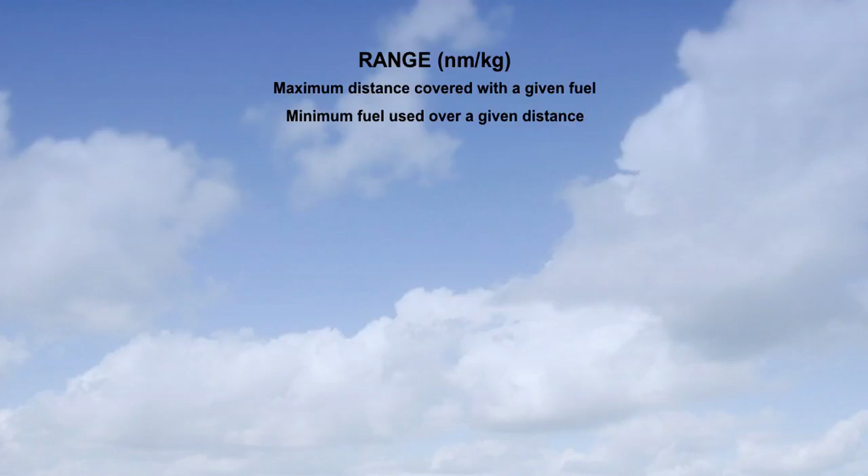Maximum range can be defined as being the maximum distance an aeroplane can fly for a given fuel quantity consumed, or to put it another way, the minimum fuel used by an aeroplane over a given distance. This latter expression of range is more commonly used for commercial operations. As a formula, range is simply the distance in nautical miles divided by fuel quantity in kilograms.

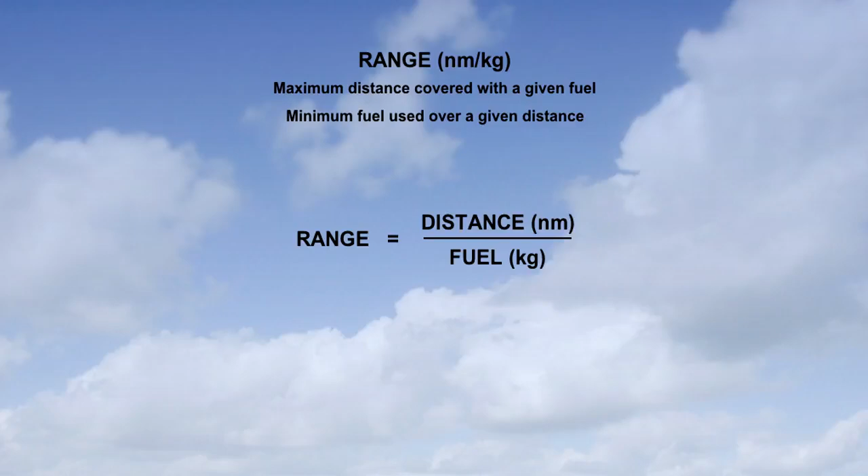However, in the same way as we did for the formula for endurance, we must adjust our range formula in order for it to give us useful information. The top line of the formula is air nautical miles per hour, and the bottom line of the formula is kilograms of fuel per hour. Thus, the formula now reads true airspeed divided by fuel flow. This is the formula for specific air range. The formula shows that specific air range is defined as the ratio of true airspeed over the fuel flow.

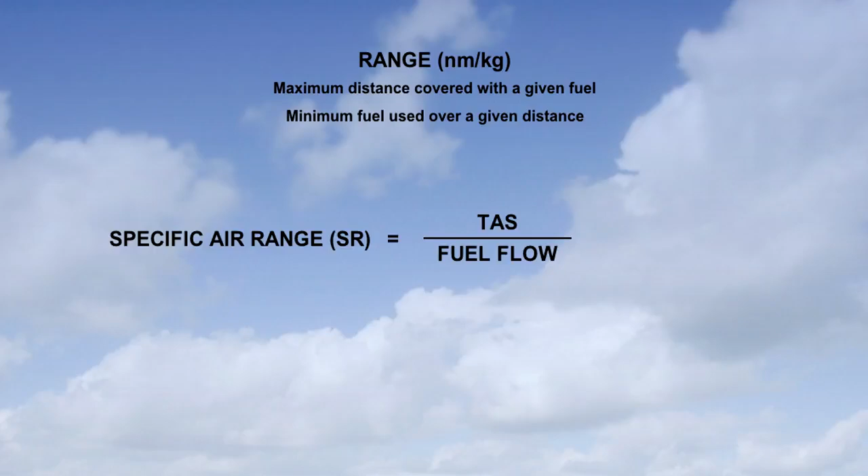You may recall from the endurance lesson that fuel flow is specific fuel consumption multiplied by drag for a jet, and specific fuel consumption multiplied by power required for a propeller-driven aeroplane. Looking at the formulae, it is now obvious that in order to maximize the specific range of the aeroplane, true airspeed must be high and the fuel flow must be low.

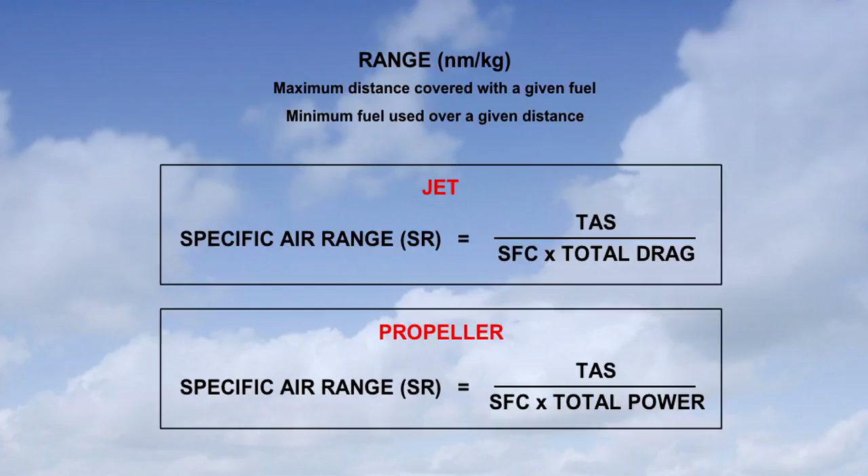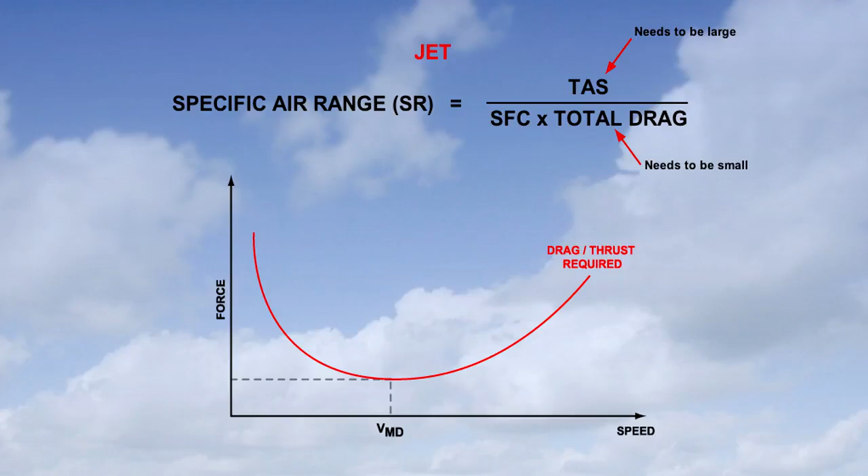Let us now focus on the specific air range of the jet aeroplane. We stated earlier that to maximize the range, the TAS must be high and the specific fuel consumption and the drag must be low. Shown on screen is the drag curve for a jet aeroplane. If the aeroplane were to fly at VMD, then of course the drag force would be at its lowest. Referring to the formula, it seems we have solved one of the points, namely how to make drag as low as possible. However, looking at the graph, notice that because the drag curve is fairly flat at the bottom, the speed may be increased significantly from VMD for only a small drag penalty.

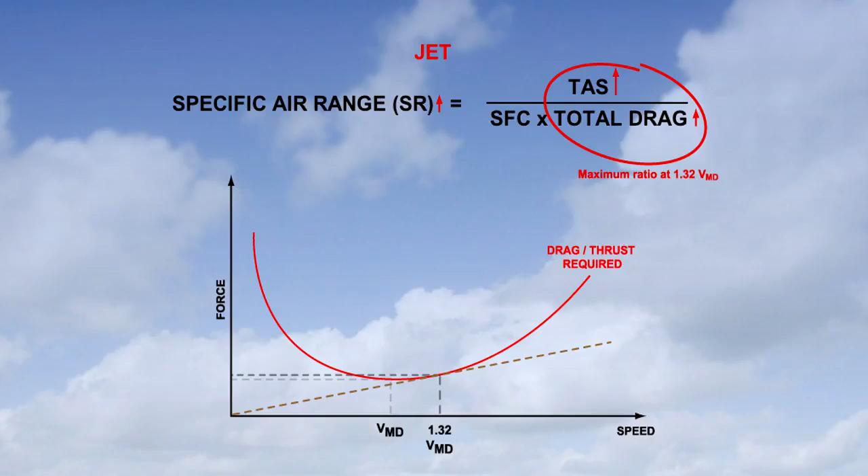From the formula, we can therefore see that whilst drag has increased a little, which is bad for range, the airspeed has increased significantly, which is good for range. Consequently, the overall effect is that there is an increase in specific range. The speed at which the speed-drag ratio is maximized may be read from the graph at the tangent to the curve. You may recall that this speed was 1.32 VMD. Therefore, it is 1.32 VMD that is the speed for maximum range for a jet aeroplane.

There is now only one remaining item left in the formula which still needs to be resolved. In order to increase range even more, specific fuel consumption must be decreased. You may recall that the only way to do this for a jet aeroplane is to operate at as high an altitude as possible. Operating as high as possible will give us a higher true airspeed for any given indicated airspeed, which again will improve the specific range.

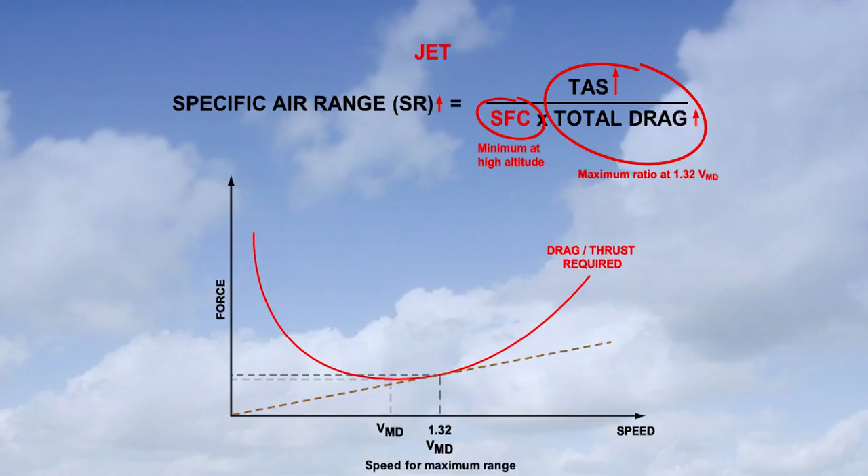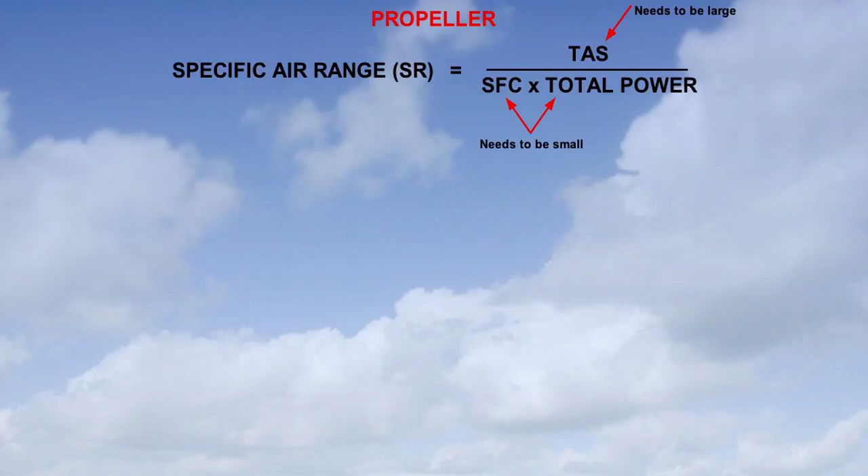The point at which the speed-power ratio is at a maximum is the tangent point of the curve. You may recall that this speed is VMD. Therefore, it is VMD that is the speed for maximum range for a propeller aeroplane. There is now only one remaining item left in the formula which still needs to be resolved. In order to maximize range even more, specific fuel consumption must be decreased. However, you may remember that specific fuel consumption for piston aeroplanes is fixed, whereas for turbopropeller aeroplanes which use jet engines, the specific fuel consumption decreases with altitude.

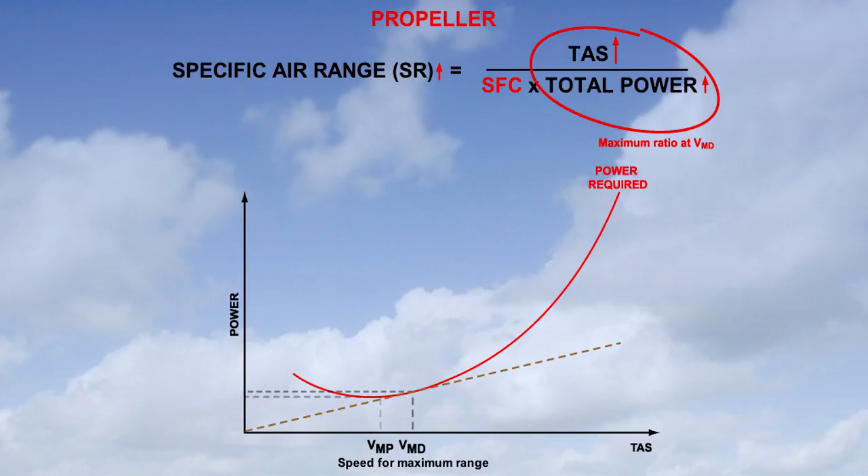Having studied how to achieve maximum range for both jet and propeller engines, let us now examine what factors affect range. The first of the factors to discuss is the effect of weight. You will recall that increasing the weight of the aeroplane increases induced drag, and thus moves the total drag curve and power required curve up and right.

For a propeller-driven aeroplane, it is much the same. At higher weights, more power is required. Therefore, fuel flow increases and range decreases. However, notice too that the speed for best range, VMD, is higher. Remember also that at higher weights, the operating altitudes are reduced, which for a jet aeroplane means that the specific fuel consumption increases, because at lower altitudes, the jet engine is less efficient.

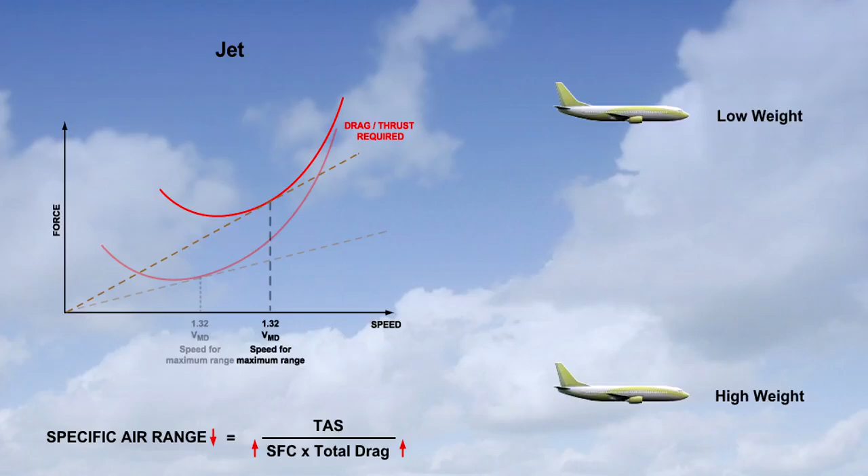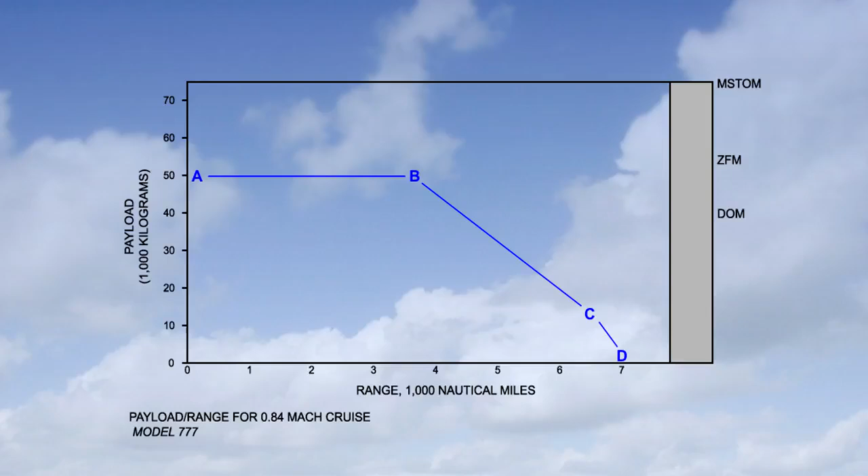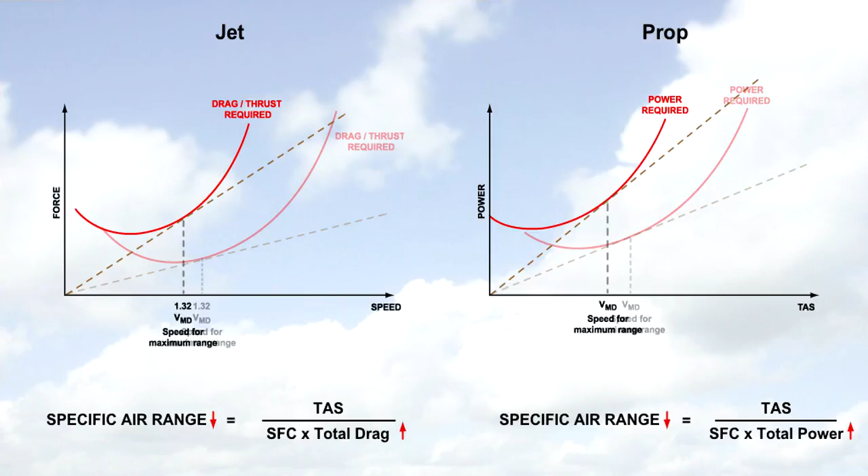Another factor affecting the range is the aeroplane's configuration. You will recall that deploying the flaps and undercarriage increases parasite drag and thus moves the total drag curve and power required curve up and left. Looking at the graph for the jet aeroplane and using the drag curve, you can see that with the gear and flaps deployed, the aeroplane has more drag and therefore needs more thrust, which, in turn, requires greater fuel flow. This will decrease the range. However, notice that the speed for maximum range, 1.32 VMD, is now lower.

Looking at the graph for a propeller aeroplane, you can see that matters are much the same. With gear and flaps deployed, more power is required. Therefore, fuel flow increases and range decreases. But also notice that the speed for best range, VMD, is lower.

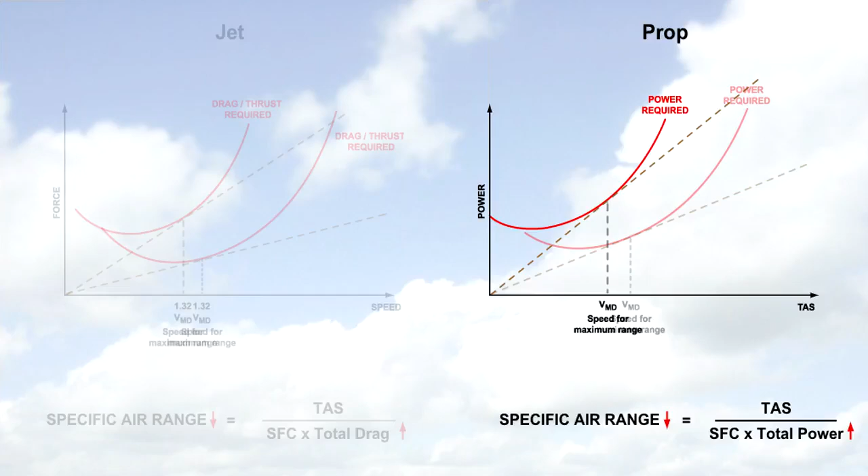A point always to bear in mind in the cruise is that any increase in parasite drag will be detrimental to range and endurance. Increases in parasite drag can be caused by any number of things such as damaged and misaligned surfaces. The extra drag created by misaligned or misrigged airframe surfaces creates a type of drag called excrescence drag. This can be more than 4% of the airplane's total drag. Careful pre-flight inspection should reveal misaligned or misrigged surfaces.

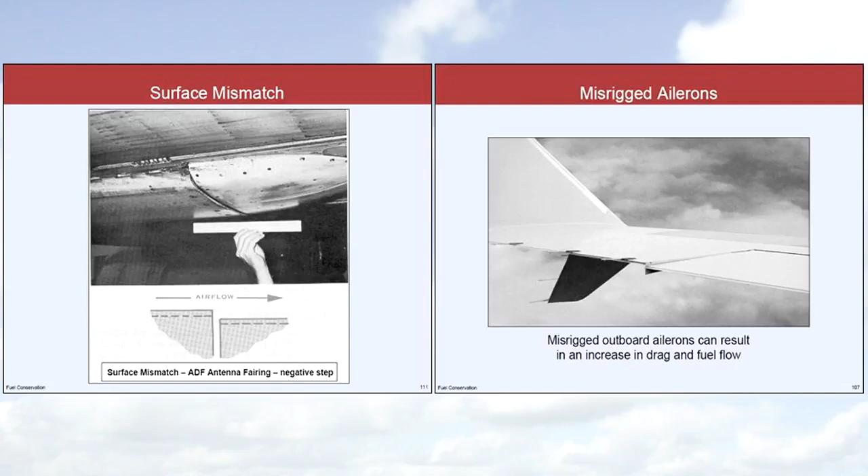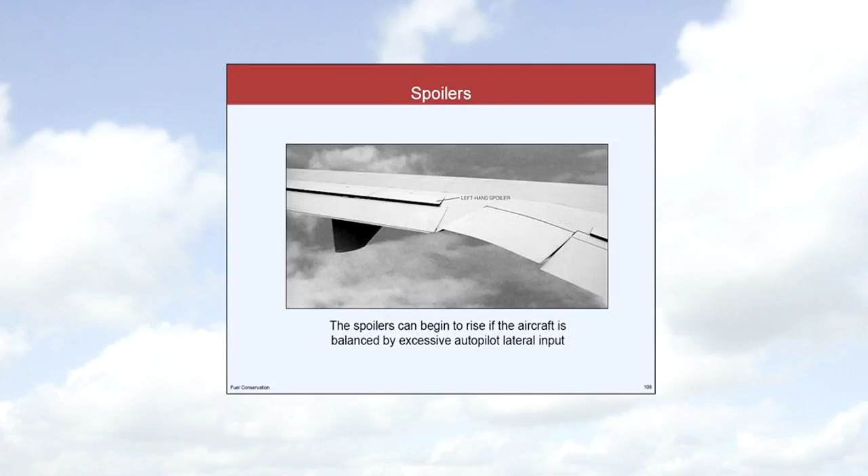An important point to consider over which the pilot has direct control is aeroplane trim. A pilot must periodically check the aileron and rudder trim, the spoiler misrig, and the trailing edges to ensure that the aeroplane is in trim and is in balanced flight. Monitoring the aeroplane's control surfaces will help to reduce the extra drag and extra fuel consumption that out of trim and unbalanced flight can cause.

Lastly, contamination on the airframe from airframe icing can affect fuel flow. This icing will not only change the shape of the wing, making it less efficient at producing lift, but it will also increase weight and drag. All this is detrimental to aircraft performance and will reduce the aeroplane's range.